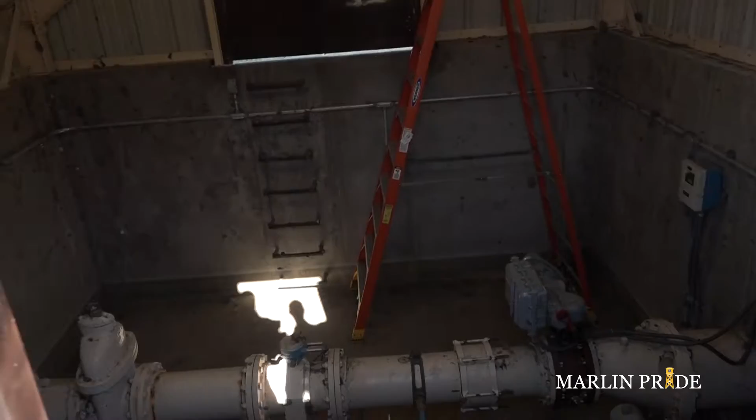So from the splitter box, the water then goes into our 2 clarifiers over here, Clarifier 1 and Clarifier 2. Clarifier 1 is the clarifier that will be completely rehabbed next winter. I don't know how good of a shot that is, but these are our raw lines right here, the lines that feed the lake water into our treatment plant.

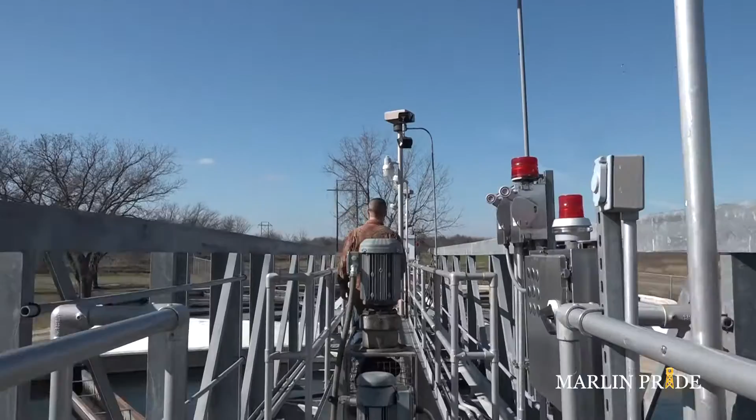This is clarifier 1, the larger of the 2 that we have. How these work: you have the mixer in the center. The dirtiest of the water, the beginning of the water, comes up through the center, and the mixer's mixing the chemical. It's called a coagulant, and the coagulant binds to the organics in the water, and essentially when it binds, it makes it heavier, so it settles. So it's grabbing all of the dirt in the water, and it makes it settle, and it creates a blanket down here.

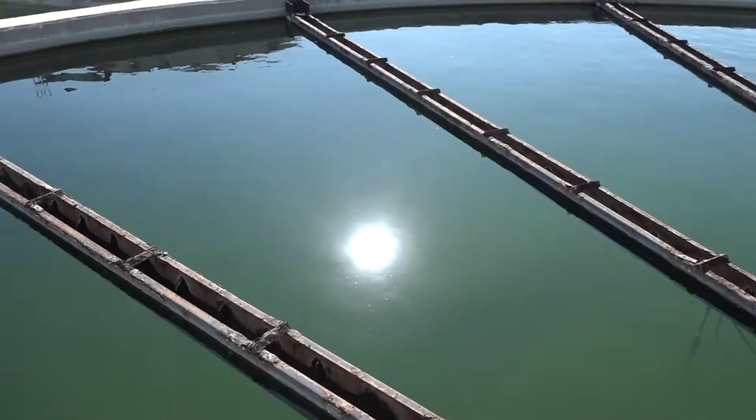And these are upflow clarifiers, meaning that the water comes up. So as that water comes up through that blanket, it acts almost like a filter. And the cleanest water comes up to the top and enters these pilot holes in the troughs. Once it goes into these troughs, it comes into the center ring and then discharges into the discharge. And from that discharge it gets sent to the filter feed basin, as you can see over there.

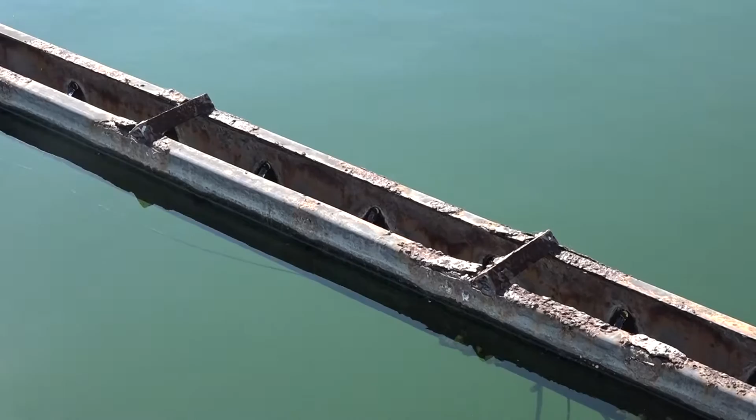So part of the rehab is actually going to be to replace all of these troughs here. They'll all be brand new. They'll be stainless steel and coated. Also, the center ring will be replaced, and there's a bell below the water level. All of that's going to be repainted and primed, to get as much life out of it as possible. We actually utilize this to do settling tests.

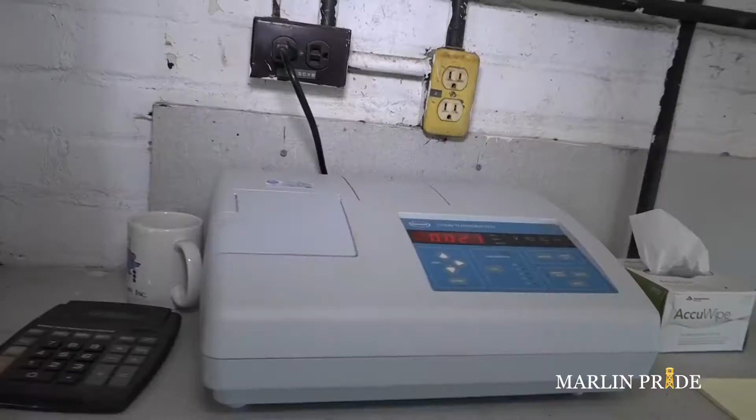We'll actually take samples from those center rings, and we can actually time it and see how much settling we're achieving, and it gives us an idea of how well our chemical dosage is doing. This is a turbidimeter. This measures how clear the water is. So we actually measure the turbidity as well as chlorine residual throughout the entire treatment process.

So one of the cool things about the water plant is that we actually recycle as much water as we can. The filter backwashes actually get flushed over here to these concrete lined ponds, and that water then gets recycled to the back of the plant and we retreat it.

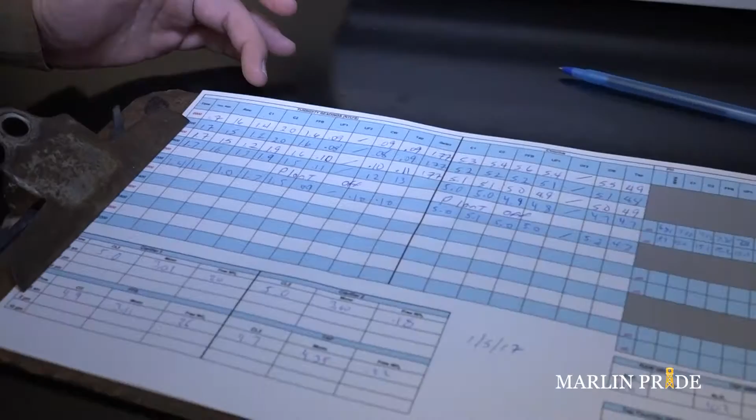It's required by the state that we take these chlorine and turbidity readings every 4 hours. We don't only meet those standards, but we exceed it, and we actually sample every 2 hours throughout the water plant. And these are the different sampling points. We have a total of eight sampling points that we test, and we run multiple tests: pH, turbidity, alkalinity, total hardness, chlorine, fluoride, free ammonia, and monochloramine are all things that we test for.

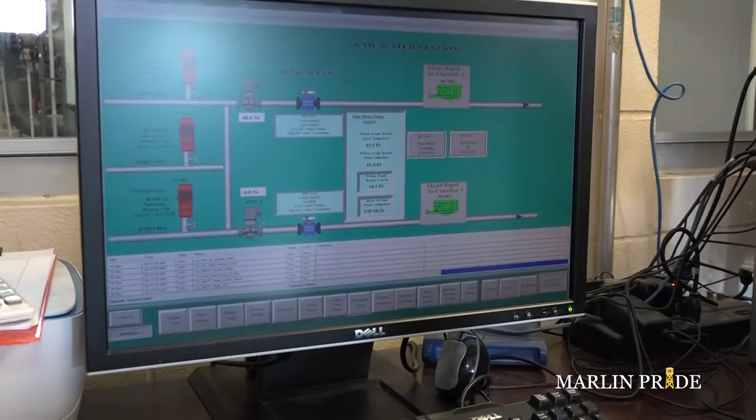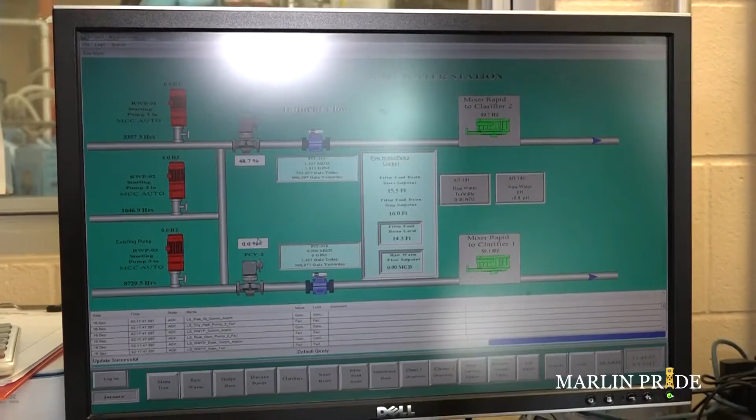We can actually walk through the entire plant via the computer here. These are those 2 raw lines that we showed you over there by the dam. The water comes in through one of the 2 pipes here, and every Wednesday they get cycled, and we'll switch over from one to the other. From there it goes into the 2 clarifiers you can see here.

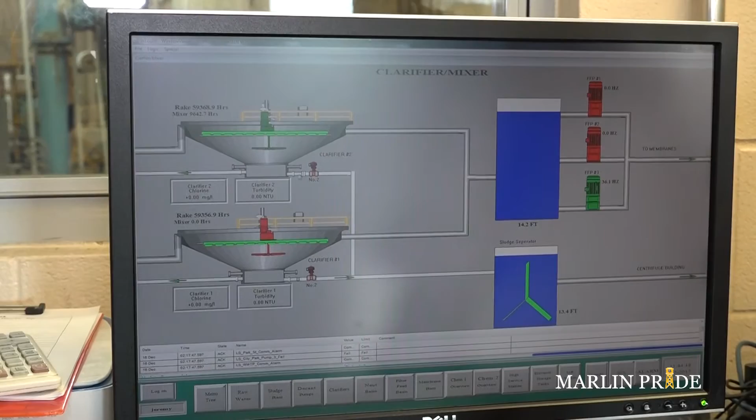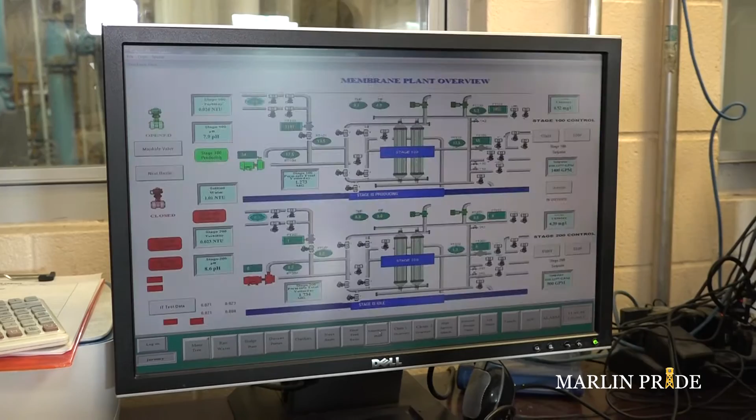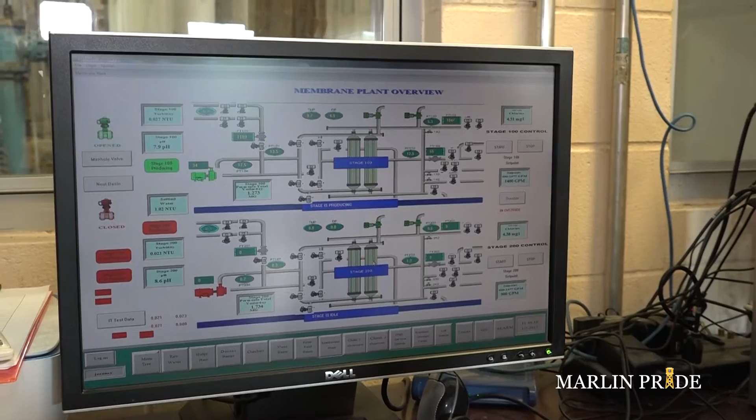From the clarifiers they go over to the filter feed basin, which is the basin right behind us between the clarifier and the membranes. So you can see one pump's on. We're currently producing 1.4 million gallons of water today. From there it goes into our membranes. These are the filtration systems here. Currently we're using stage 1, as stage 2 down here is the one being replaced. We're able to check the levels of all of our chemical tanks here.

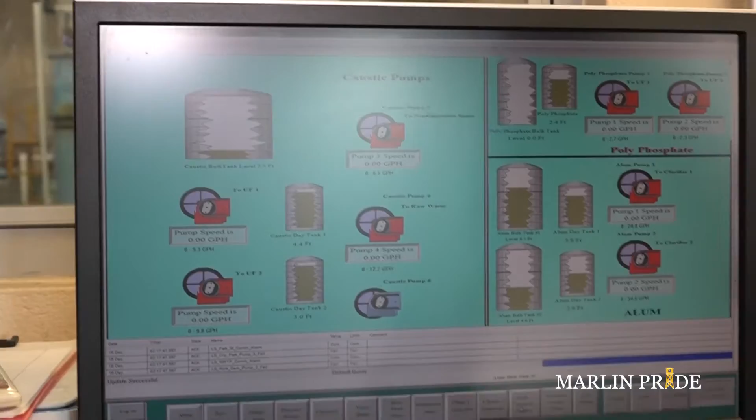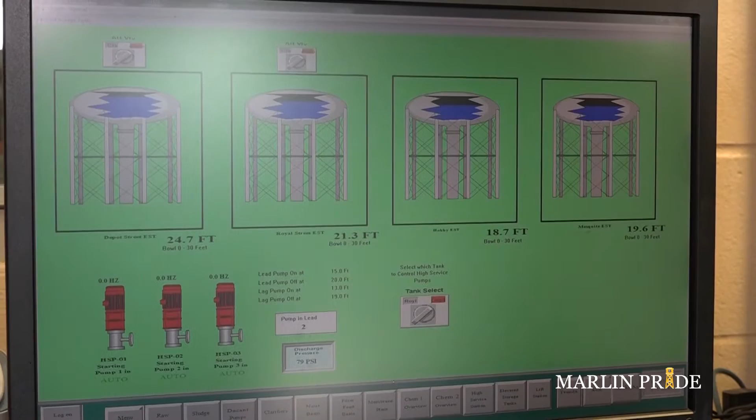So from the filter it goes into our clear well, which is this tank here. We have 3 water pumps that we're able to pump into town with. We cycle those each time we run a different one to keep them exercised. From town we have 4 water towers that we fill and constantly monitor.

So as many of you know, a lot of the automation was taken out of this plant several years ago. It's something that we're constantly working on. Every budget year we will be selecting one area of the plant to put back into automation, and it's going to be a slow but methodical process to get everything back how it was originally spec'd.

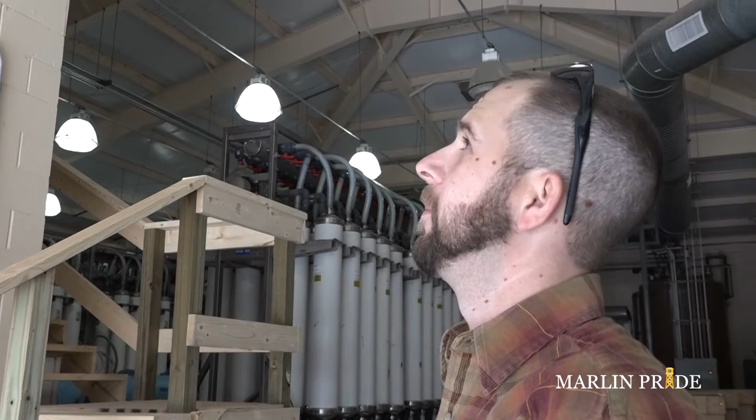We're currently constructing a new office storage space at the water plant. It's going to be used to store all the lab results and data that we're required to keep for 5 to 10 years. We're actually going to be storing it here. It's going to be climate controlled and protected from the elements. We can go up here and look at it. It's by no means complete yet, but it's well on its way. You were at the old water plant. You can see the need for a climate controlled area to store all of our documents.

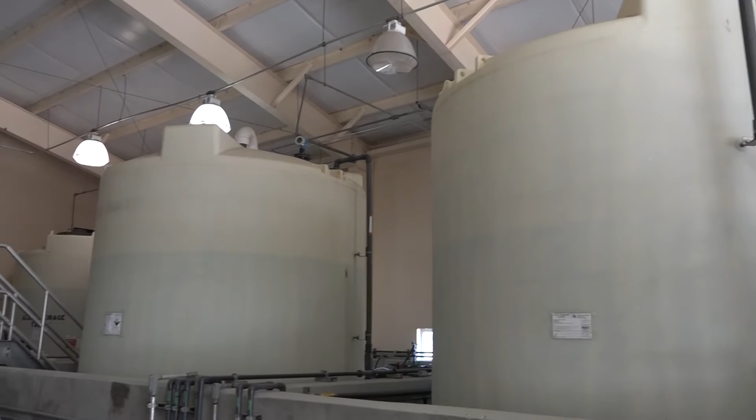So these are the chemical bulk storage tanks here. We currently use coagulant, alum, caustic, fluoride, citric acid, bleach, and chlorine gas to treat the water. Each one of them's used at different stages of the treatment process. All different kinds of ball valves and fittings that our membranes use. And as you can see, we actually have on-hand parts now which are essential to keep the water plant running.